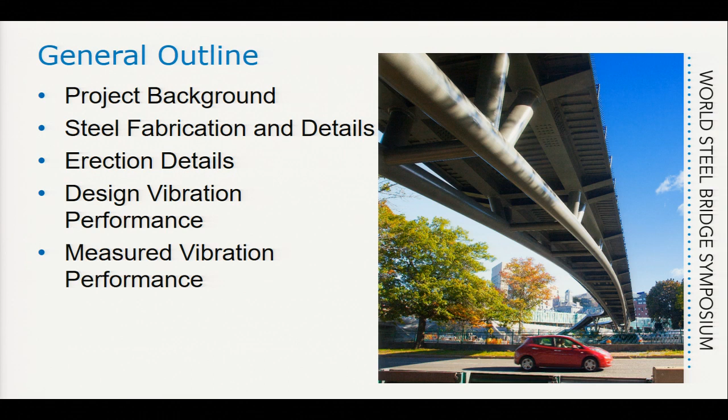I'm going to give you a little project background this morning, some of the steel fabrication and detailing that went into this bridge design, as well as some of the erection details during construction. And then I'm going to hand it over to Bill to talk more in depth about the pedestrian-induced vibration design, as well as our testing that we did once the bridge was constructed.

The bridge is located on the Boston side of the Charles River, adjacent to the Longfellow Bridge project, as Jeff mentioned, which you can hear about at 3 o'clock today if you're interested. And you may wonder, who is Fanny Appleton? Well, Fanny Appleton is the second wife of Henry Wadsworth Longfellow.

The bridge is a main thoroughfare for pedestrians as well as bikers between Charles Circle, which is the Red Line T-stop for the MBTA, and the Esplanade. If you're familiar with the annual 4th of July events in Boston, the Boston Pops play on the Esplanade. Hundreds of thousands of people show up, and when the fireworks end, those hundreds of thousands of people are trying to get back to the T to get home. So the live loading on this bridge is literally shoulder-to-shoulder people at the end of every event on the Esplanade. So we did go ahead and up the standard live loading on the design of this bridge.

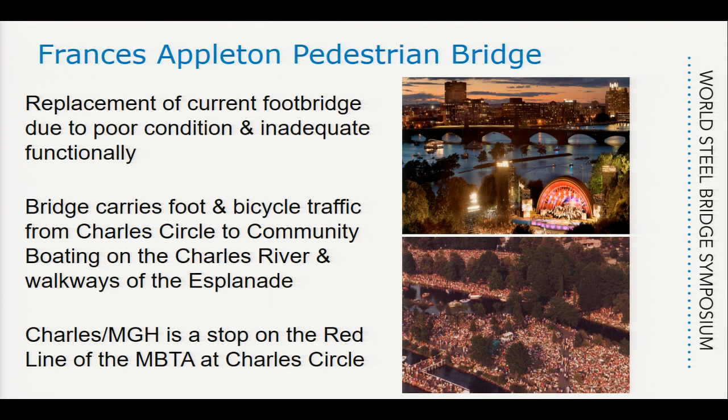As we said, we worked in a design build contract, for the joint venture WSC, which included JF White, Skanska, and Consigli. The fabricator was Newport Construction out of Maine, and the erector was Saugus Construction. We had a very detailed contract in terms of some of the requirements for this particular bridge and some of the aesthetic constraints. So working with the contractor, we tried to balance the service and strength design along with the pedestrian user experience.

So we had a preliminary design that we were given that had an architectural intent for this bridge. The intent was for it to look like a ribbon-like structure, and the arch was supposed to emulate the arches of the Longfellow Bridge nearby. So you can see there's a steel fascia plate that runs along the edge of this entire structure, which gives it that ribbon-like appearance. The bridge also is ADA compliant, is wide enough for shared use between pedestrians and bikers, and we also created an overlook so you can see the Charles River as you're weaving through the trees.

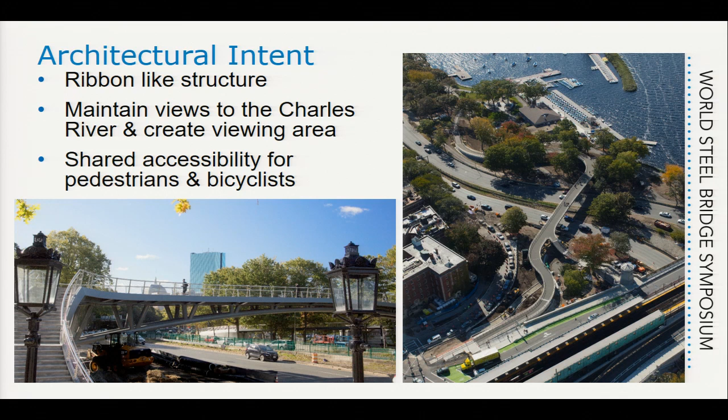Here you can see an overall view of the bridge as it curves in every direction for 750 feet. 100 feet at either end are concrete ramps, and 550 feet are elevated structure.

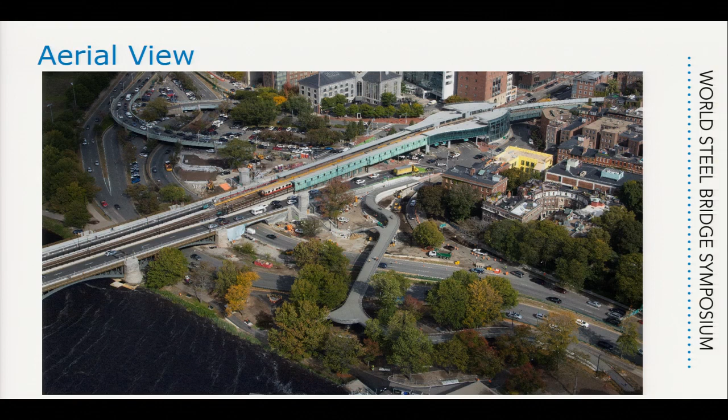The main span of the bridge is a divergent pipe arch, as you can see here, with HSS spandrel columns, which make up the Vierendeel truss of the main span. It's 220 feet, and it is supported on either end, as you can see in the foreground, by skewback abutments.

And the elevated sections of the approach spans are supported by Y piers. You can see the framing underneath: there's a pair of box girders that run continuously from end to end, floor beams, a cantilever bracket that supports the fascia plate, and the Y piers, which are welded at the top to those girders, have an architectural inset, if you can see on the photo to the right. That was prescribed by the architect as well.

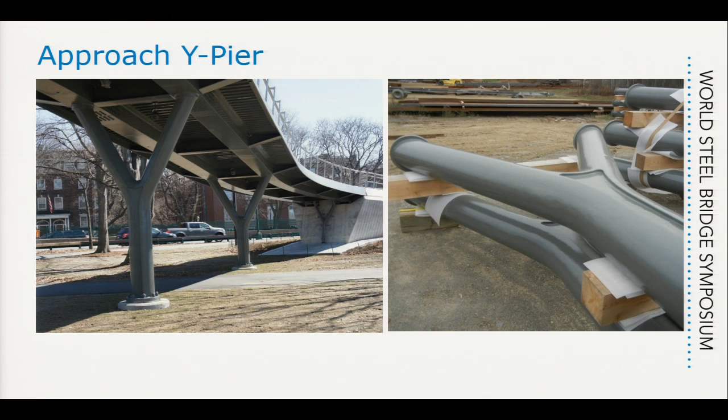In order to create that inset detail, we created these piers as a built-up section at the base, an HSS built-up section, and HSS columns for the arms, and the Y joint was created with a steel casting.

Newport Fabrication brought in Cast Connex to fabricate the casting. We did a design on the casting as well as Cast Connex in order to create this detail and geometry.

One of the constraints of the contract was that the bridge was to be jointless. So between the 550 feet from abutment to abutment, there are no expansion joints, which drove temperature loading to be a very prime design loading condition.

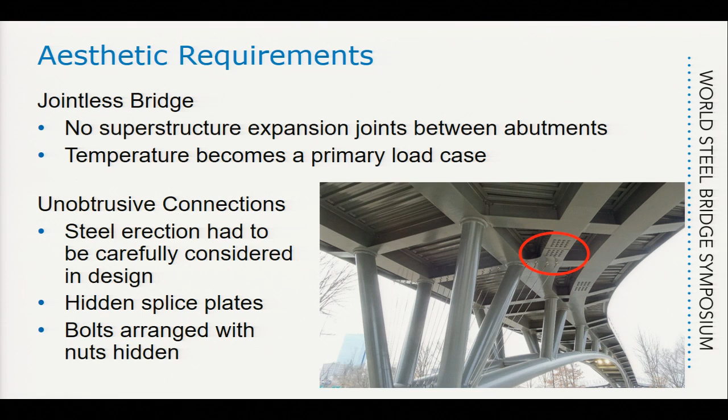We were also prescribed to have unobtrusive connections, which led to a lot of discussion as to what unobtrusive really means. We did propose to include bolted splice connections on the tub girders to aid in erection. However, the splice plates are internal to the tub girders and the nuts are on the inside, so they are less visible. We also had to show along the length of the bridge the location of those splices so they were less visible to the traveling public.

The fascia plate girder that travels the entire length of this bridge is continually curving throughout. In order to create that fascia plate without any kinks or waves, we had some really tight fabrication tolerances, similar to architecturally exposed structural steel.

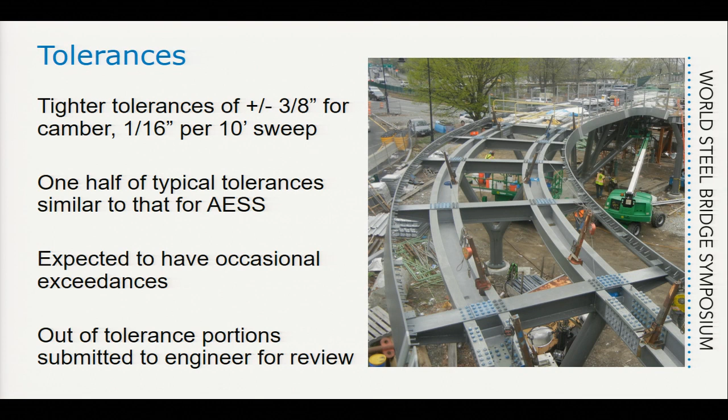Those tolerances translated back to the fabrication of the box girders as well. Because the fascia plate is supported by the cantilever brackets off the box girder, those girders had to match that same tolerance that the fascia plate had in order to meet fit up.

Here you can see the entrance at the ramp. The ramp is 100 feet, it's concrete. You can see that the architecture kind of matches that ribbon type appearance at the top, and then it has an incline down to the foundation.

In Boston, right along the Charles, the soil is fairly poor because it's all been filled in. So in order to reduce the amount of substructure and piles for this foundation, for this ramp section, as you can see in the foreground here, we filled the concrete ramp with foam in order to lighten that up.

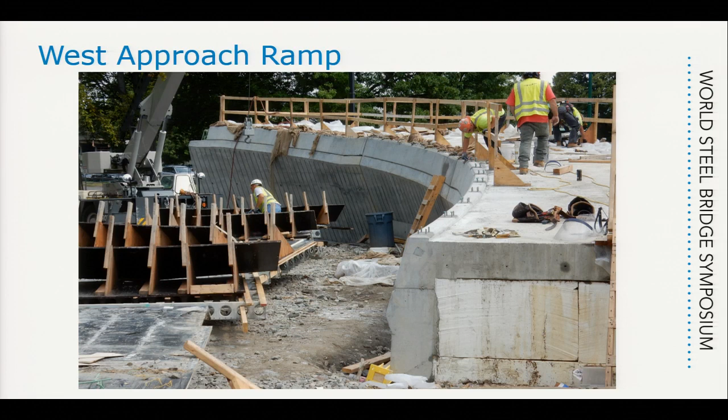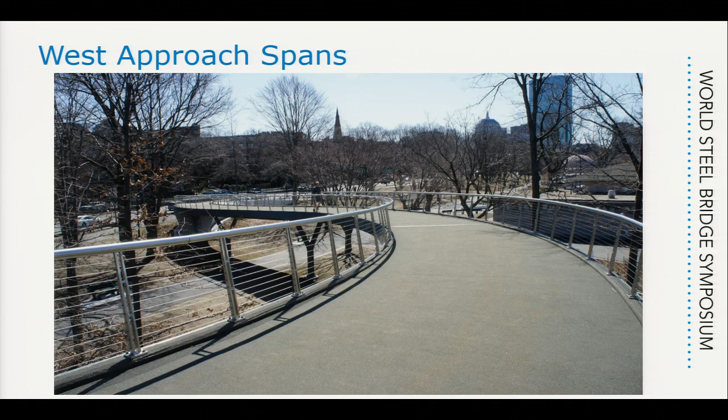The entire length of the bridge has an epoxy-coated wearing surface and a railing system. The infill on the railing system is a stainless steel cable system. And here you can see the overlook that was created looking out into the Charles River.

This is looking up to the crown of the arch span. Every piece of steel is curving in every direction throughout the length of the bridge.

Here, as you come across the main span, the ramps part of the bridge continues, but we also have stairs as well. So at either end of the main span, there's a set of curved stairs, and here the curved stairs diverge from the main bridge deck structure.

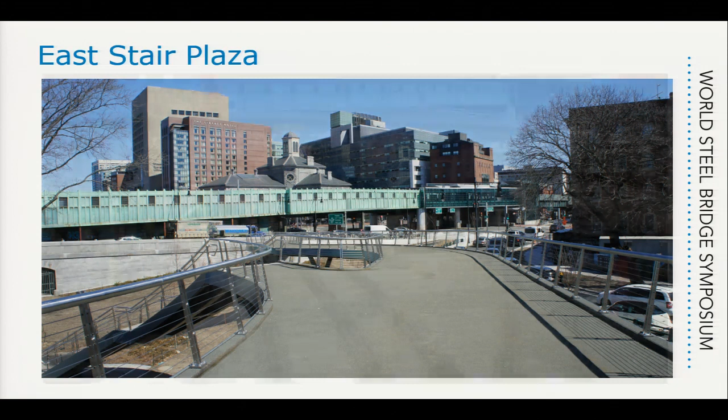This is a little tricky in creating that fascia plate. It's a pretty tight radius on that fascia plate. The detailing to merge the two sets of box girders and splice those together created some interesting detailing for the plate connections.

You can see here the shear studs on the top of those girders, as well as the stay-in-place forms that were used.

The curved stairs span from ground to bridge deck elevation. There's no pier in between, and that's supported by 4 steel girders.

The 2 main girders in the middle you see here, being in the shop. And the exterior fascia plate girder, which we've created into more of a structural member to help support those stairs, and Bill will touch on that more later.

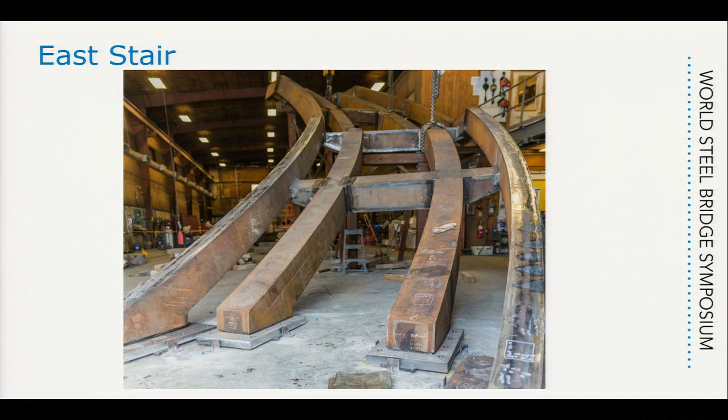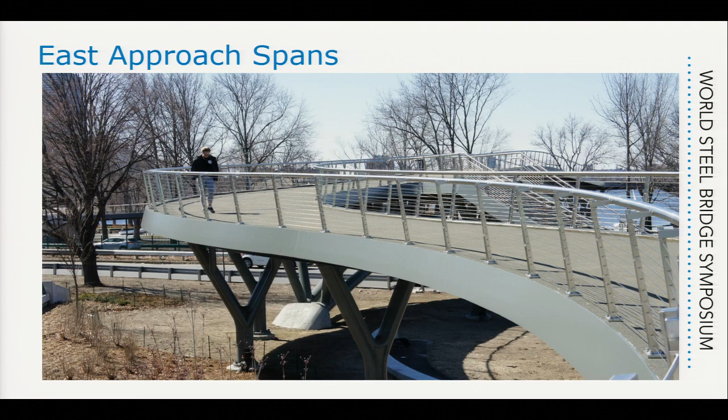Here's just an example of how that fascia plate, in curving throughout, is very smooth. And here, coming down to the ramp at Charles Circle.

The arch sections were delivered in 2 pieces and then spliced together on site. The short spandrel columns were welded to the arch section in the shop. However, the longer spandrel columns we could not weld in the shop due to shipping delivery constraints.

So we created some alignment studs so that once the spandrel columns get out into the field, they'd be able to set those because, again, they're not perpendicular square—everything is on a different angle. Those studs assisted the erector in trying to line everything up.

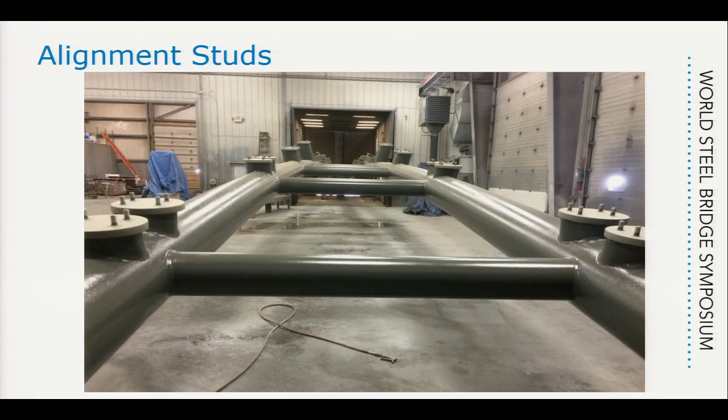The main deck framing was fabricated in 3 sections for the main span. Here is a picture of the center section getting dropped in on top of the arch, on top of those shorter spandrel columns. So that framing all came out together.

Here you can see some of the erection tabs that were used on those spandrel columns to get those in place. They were field welded, field metallized, and then field painted. The cap plates as well were welded to those tub girders at the top in the field.

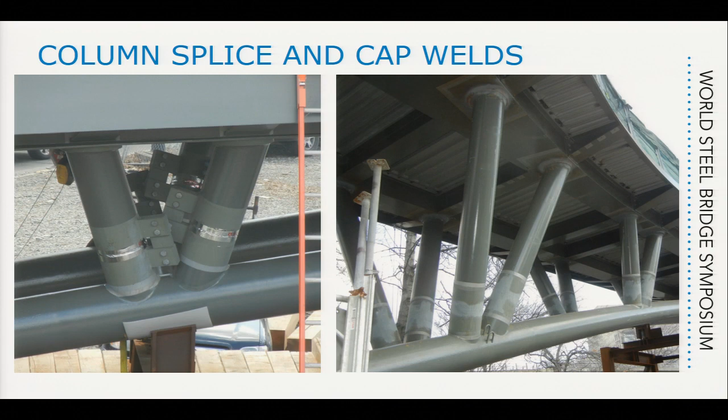And with that, I'm going to turn it over to Bill to talk about the pedestrian-induced vibrations.

Thanks, Marian. As you can see, this is a fairly slender arch shape that we have to deal with here. From the very beginning of this project, we realized that pedestrian-induced vibrations could be an issue for this bridge. Generally that occurs when the frequency of a bridge is low enough that it starts to coincide with the actual pace that people walk at. When those two frequencies align, you get an increased magnification of the response of the structure. So in some ways you can eliminate that by changing the stiffness, changing the mass, or introducing damping of the structure.

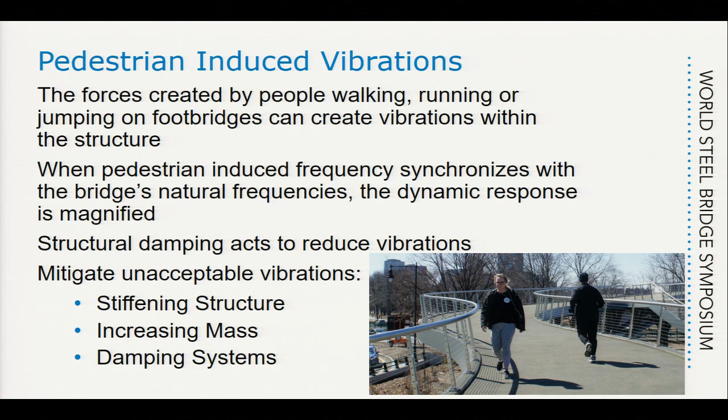By contract, we were required to meet the requirements of the AASHTO pedestrian guide: 1.3 hertz for any horizontal mode, 3 hertz for a vertical mode, or they give an option for meeting an alternate criteria based on the weight of the span. So we met the horizontal. We didn't meet the 3 hertz, but we met the weight requirement.

Being a high-profile bridge, we wanted to make sure there wouldn't be any issues where we open this bridge and then have to shut it immediately afterwards due to vibration. So we ended up doing an additional analysis using Setra, a French publication that's actually referenced by AASHTO. It allows for a time history analysis of the structure, and it takes the accelerations that come out of that time history and gives you different comfort levels that you can associate those accelerations with.

We also used a specialty sub-consultant, RWDI. They ran an independent analysis of the structure, and later on helped us with the physical testing of the bridge. So just a brief overview of what we did for modeling.

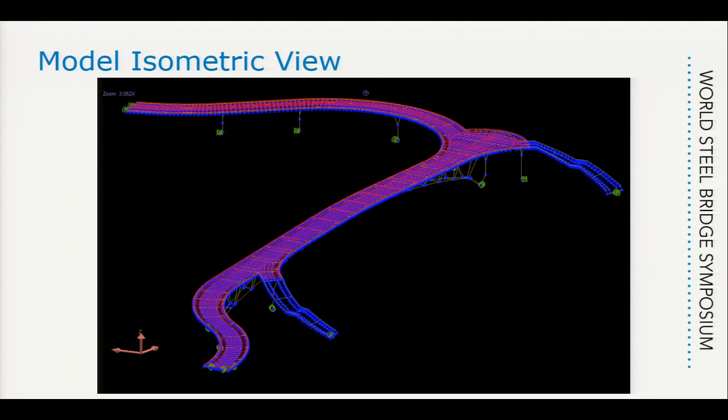It was a full 3D model of the bridge, steel length, 550 feet end to end. We had soil springs for foundations, and we put in shell elements to reflect the stiffness of the deck. Our first vertical mode of vibration shown here is kind of a vertical and longitudinal movement of the arch, at 2.39 hertz, which is less than the 3 hertz that I mentioned earlier.

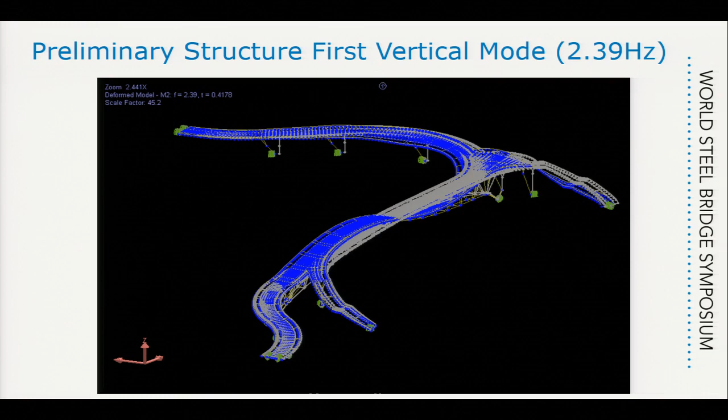So we knew we were going to be in this realm of having to do additional analysis. Setra lays out basically 3 acceptable comfort levels for pedestrians: maximum, average, and minimum. If you don't really meet those, then you end up in an unacceptable area. Our initial design landed us in the average towards minimum comfort range. In talking with the owner and MassDOT, we decided that we should probably shoot for a maximum comfort level, which would be up to 5% of gravity, and that's basically practically imperceptible to most people walking across a pedestrian bridge.

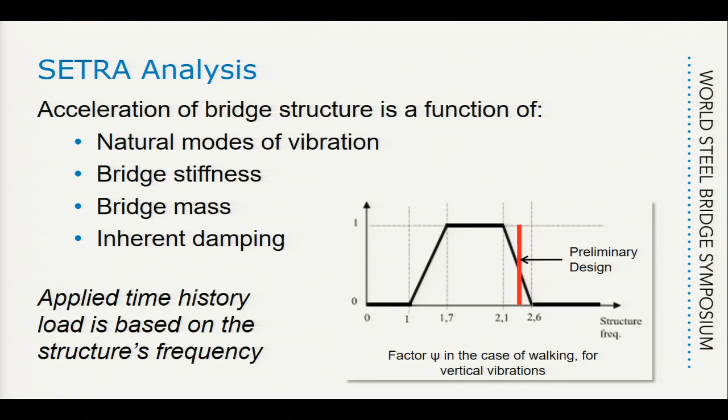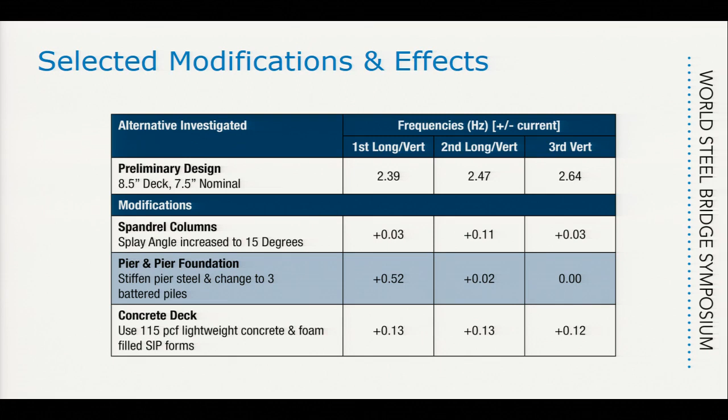So we started with that 2.39 hertz, and we were at a minimum comfort level. We decided we had to make some changes to the structure. We looked at about 15 different alternatives. What we really came up with was making changes to the deck system, spandrel columns, and the pier and pier foundation stiffnesses. For the deck, we had originally started with a normal weight 4,000 psi concrete. We ended up changing to a 5,000 psi lightweight, foam-filled, all stay-in-place forms so we could get rid of any additional mass that's not really participating in structural stiffness.

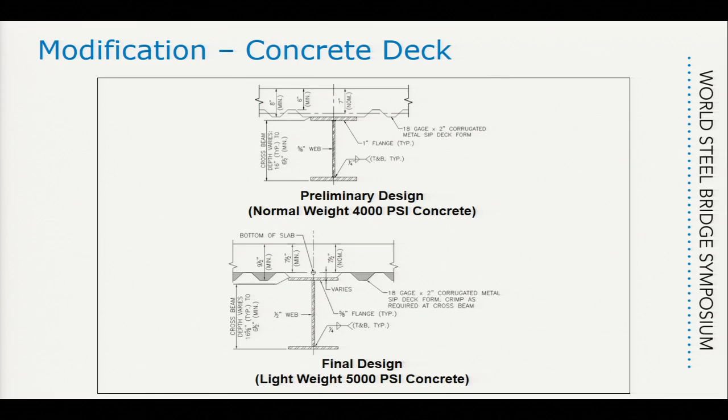The spandrel columns, we went from 7 degrees from plumb, which really acted only as a Vierendeel truss, to a 15 degree offset. That gave it more of a normal truss action, although it still really relies on the Vierendeel truss action.

As Marian mentioned, the structure is continuous, so thermal effects control a lot of the pier loadings, so we weren't able to stiffen every foundation. But we did examine which piers would allow for a stiffer foundation, and we changed from a 2-pile vertical configuration to a 3-pile battered configuration to add stiffness in each direction.

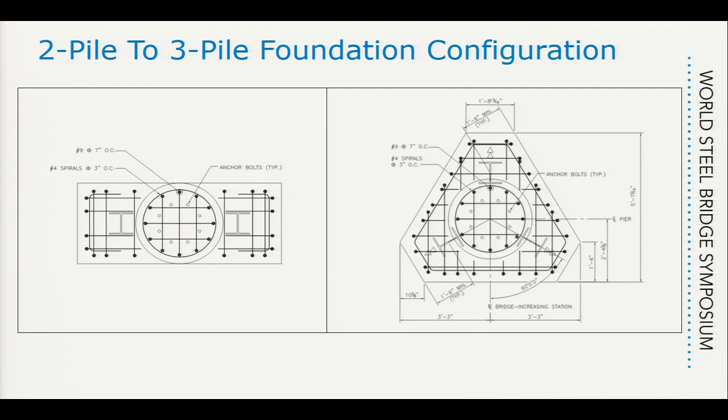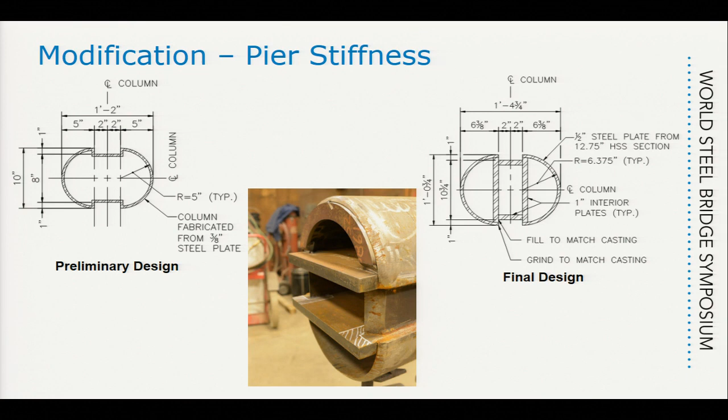The pier columns themselves, we ended up increasing in size, but towards the base of the columns we also put in internal stiffening. The photo in the middle of the screen shows the internal stiffeners running through the base of the column. Those ran through the base plates and were welded on the underside of the base plate to develop forces in them. You can see some of the backer bars starting to get placed in this section as well.

So we got up to our design for maximum comfort. Next, we needed to physically test this and make sure it would respond the way we wanted before opening it to the public. Again, we didn't want to open it and close it immediately afterwards - it wouldn't be good for us as the designer or for the state to have that occur.

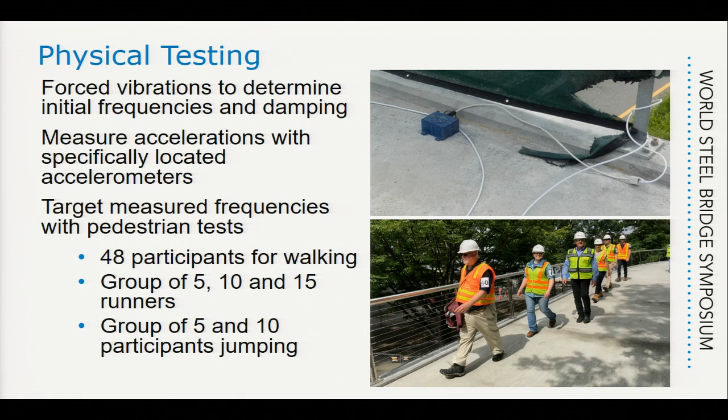So we ended up getting 48 participants to do our own testing of the bridge, and we placed accelerometers throughout. Initially, accelerometers were placed on the bridge and excited just to determine the actual mode shapes, the frequencies, and what we actually had for damping.

So the first mode that we originally were looking at, we thought was primarily a horizontal mode shape. The actual testing returned that there was a significant vertical component to that, due to the torsion of the main span. The other mode shapes identified by the Setra analysis would no longer be a concern. We also saw a bump in the damping from our testing.

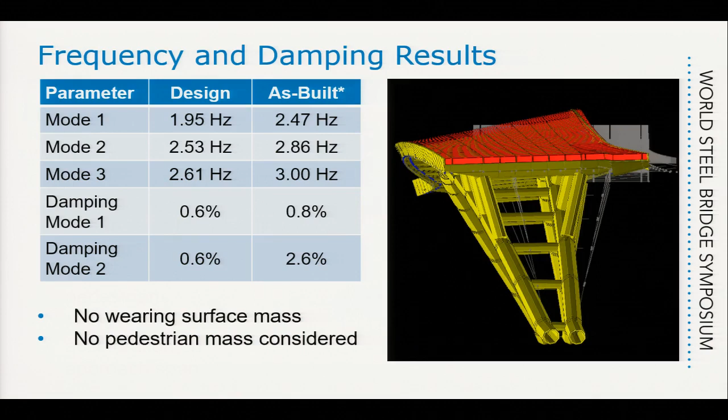So just from our general walking tests that were performed, everything landed within 5% of acceleration of gravity, which is what we were looking for. We did random testing, and then we did group tests where we had groups of 2 or 4 walk across the bridge. We had a metronome set to specifically target the frequencies we measured during that time.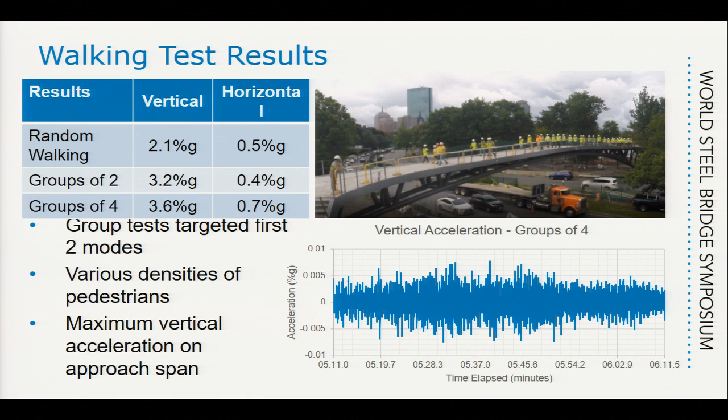Running Setra doesn't necessarily require that be examined - it's a short duration excitation to the structure. There's only a short amount of time where that vibration would affect anybody on the structure. In our case, this bridge empties into Charles Circle, which really eliminates the possibility of anybody doing road races or major events, because there's nowhere to put these people after they cross the bridge.

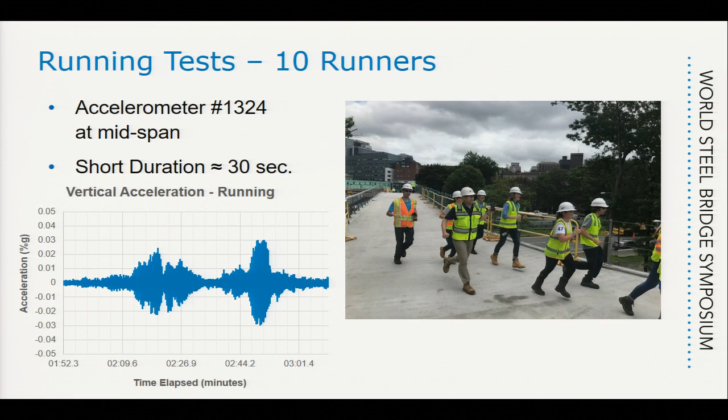Nonetheless, we did do some running tests on the bridge, with groups of 5, 10, and 15. The chart here shows what was going on with 10 runners. Again, about 30 seconds is the disturbance of acceleration actually observed on the structure, and it was still within what we were considering maximum comfort.

So obviously there was a jump between what we did for design and what was done for as-built. So we went back into our original design and adjusted parameters to try to match what was done in the field testing. When we did our field testing, we also didn't have the epoxy wearing surface, which would add some additional weight to the structure. So we wanted to match the field results and then make that adjustment, and make sure we still didn't have any issues after that.

So the 3 big ones that we probably ran into: we assumed 5 KSI concrete. At 28 days, our average strength was 7.4 KSI. By the time we did testing, we probably had some additional gains beyond that, but a decent change there.

Due to the curvature of the bridge, we had assumed that we would take stiffness reduction for cracking. We ended up putting in number 6s at 6, which is very heavy, to control the cracking in the bridge deck, and that actually proved to be quite successful. At the time of testing, there was very little cracking on the actual bridge deck, so that initial assumption was conservative.

When we developed our design, we also did 2 different foundation stiffnesses, a lower bound and an upper bound. We wanted to use the lower bound for our vibration analysis, but the higher bound for our seismic design, to make sure we were capturing what the structure actually might see. It turned out that the higher bound stiffness was realistically more what we were seeing during the testing of the bridge.

From there, there's obviously some differences between what we got in our field measurements and what we actually got from SETRA. Our horizontal accelerations were fairly close to what was determined by SETRA, but we did have differences in the vertical accelerations. We had 48 participants, which I mentioned earlier.

When we were grouping people, we did allow for some change of density in that grouping and how tightly people were spaced, but overall, we're not going to meet the same number of people that you would need to fully load the bridge with only 48 people. We were mostly a mix of our design team and construction workers, so our average person was a little heavier than SETRA's. Everyone participating was able-bodied, no children, no elderly people, so actually matching the pace and frequency of the structure would have been much easier than your average sampling of the public.

For our overall goals, we met the 5% of gravity. That's really what we wanted to meet, getting a maximum comfort level out of this bridge. The only case that did not meet that was a case of vandalism, where people were intentionally jumping on the structure.

SETRA gave us a great way to actually examine the initial structure, make improvements to it, and then evaluate it based on a dynamic loading. I think it very well served us in getting the goals for this project. In our final design, I'd say we still don't meet the AASHTO 3 Hertz vertical requirement, but going through all this additional analysis and testing, we've shown the client that we do actually meet the acceleration requirements for maximum comfort.

So here's an assessment question, and after that you guys can take down the PDH code if you didn't catch it at the beginning.

Do they need the answer now? I don't think so, nobody mentioned that. So the answer would be C, acceleration. That's kind of what I've been trying to rehash throughout this. Obviously, everything else in here does play an impact into that.

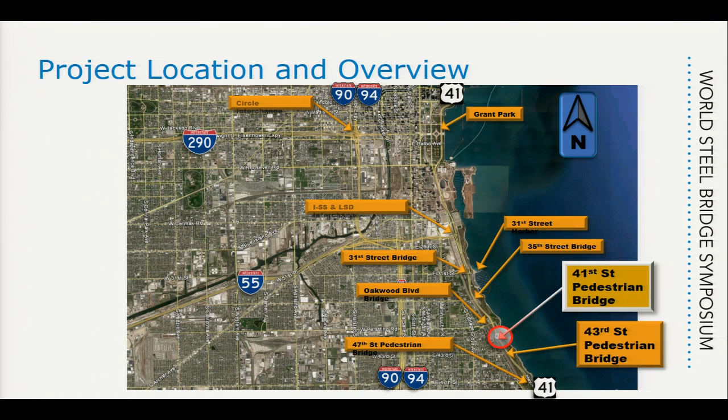For those of you not from the Chicago area or who don't know Chicago, this is a map showing a bunch of projects currently happening in Chicago, a lot of them from the Chicago DOT and Illinois State DOT. The project we're covering today is located about 4 miles south of downtown Chicago, along Lakeshore Drive, and also spans over an active railroad. It's right next to the Chicago Bears' stadium, so if you've ever visited there, you've probably driven through that area. There's a lot of construction happening in Chicago, so it's a very busy time of year for us.

The project started around 2004, almost 15 years ago. This was a competition that Mayor Daley announced, and it was only open to architects to submit applications along with engineers. There were 6 locations chosen as part of this competition, and the whole point was to create lake access. Chicago has an ordinance that requires lake access every quarter mile, which is nearly impossible, but the city is trying its best to create those access points.

Part of that came out of these 6 locations, and AECOM was fortunate to be part of 2 of them, with our architect Cordogan Clark. So what you're seeing here is exact rendering. The paint that was used was basically brush paint used to submit. There were no computer drawings or anything.

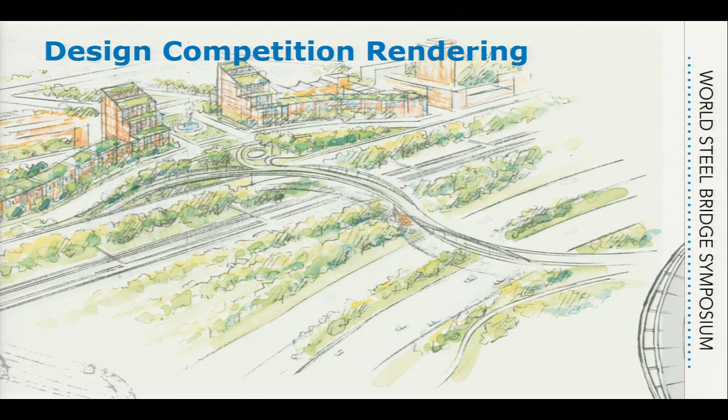I have a series of renderings I want to show you, and it was picked overwhelmingly by the public, by the residents on the south side, and we respected that. We wanted to make sure we followed through and delivered exactly what was picked 15 years ago. As time passes by, it's hard to make those commitments that were made years ago, but we were able to do that with the help of the City of Chicago.

This is just the overall rendering of the site. You see downtown in the background. There are 2 locations, 41st and 43rd. 41st opens to the public in December, and 43rd, the lower part of the picture, is currently going to procurement very soon and is planned for construction late this summer. It'll be 2 identical projects within a quarter mile from each other.

Again, just showing you the site. It's a pretty intense site. You have a lake very close to you. I'll talk about this later when we discuss construction staging, but it was very unique for us to think through how they're going to bring pieces of steel—will they barge it? With the procurement rules, we can't talk to a single fabricator because we have to be fair, so we talked to several fabricators, brought them onto the same platform to make sure they understand. We also wanted the details and plans to be constructible.

I could not do justice to the site by any photo or slide, but it is an extremely tight corridor. You have lakefront property that has to be protected. There are significant lake users in this area, bicycles and pedestrians. There are 6 active railroads, and we'll talk about the challenges of those.

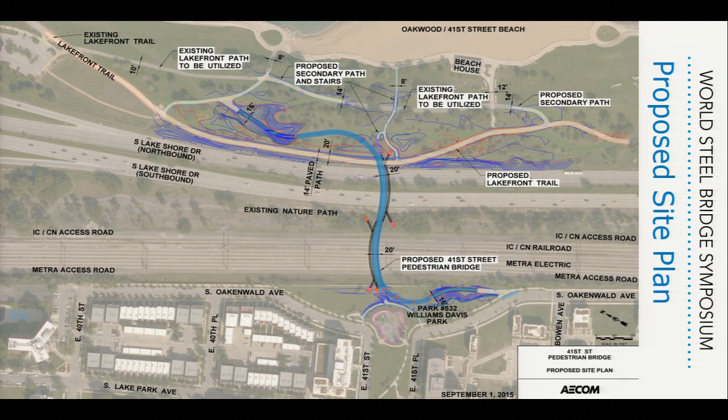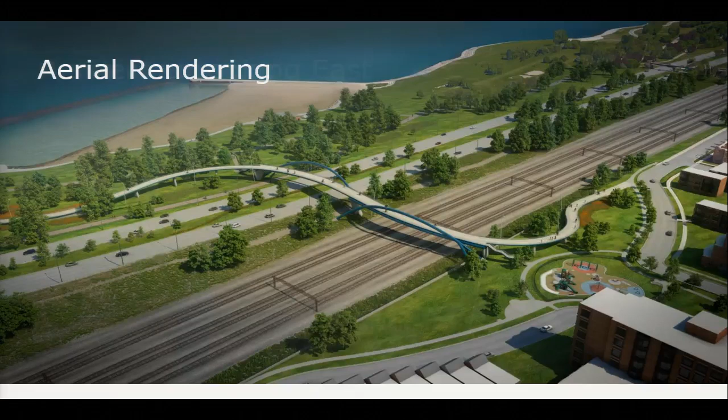We had to work around all those constraints, not only for design but also for the construction side of it. I'm going to walk you through some quick renderings, and these are important to see because the final bridge product looks just like that. We're very proud that, with the help of the city, we were able to deliver exactly what was promised years ago by an architect.

Now I'm going to say a few things to the architect community—no offense if you're an architect, we love working with them, but they sure know how to make our life miserable, and I don't have a better word, so I'll stick with miserable. What you're seeing here is what we actually improved to the concept. The kickers you're seeing, these are the basket handle kickers—they were not in the original plan by the architect. The arch angle was 45 degrees.

When the job came back to life after 10 years of planning, we did the model, and you heard about the natural frequency—I can attest to what you guys went through. I don't want to put any number to it and get the legal team involved, but the numbers were not right, and the natural frequency was not correct.

We got really concerned, so we did 3D modeling and brought our client into the office to demonstrate that we don't feel comfortable with the 45-degree arch. The deck is curving along with the arch, with absolutely no support. Luckily we're not the St. Louis Arch, but you can imagine how steep it has to be. If you just do a free body diagram, the center of gravity is way far south.

So the pipe has to be robust enough to not only sustain the self-weight, but carry the curving deck and vehicle and the live load on it, and we didn't feel good about the initial design.

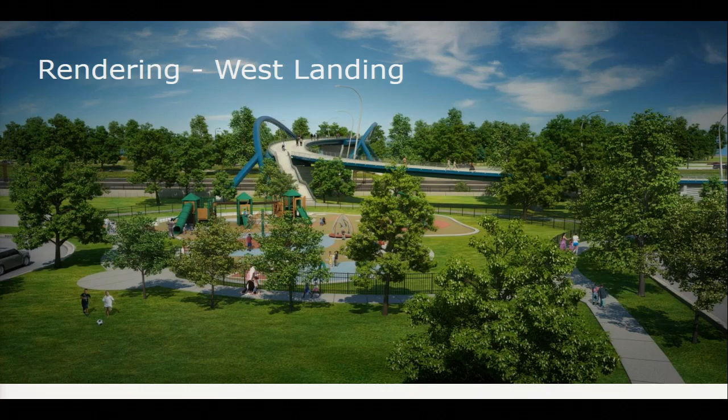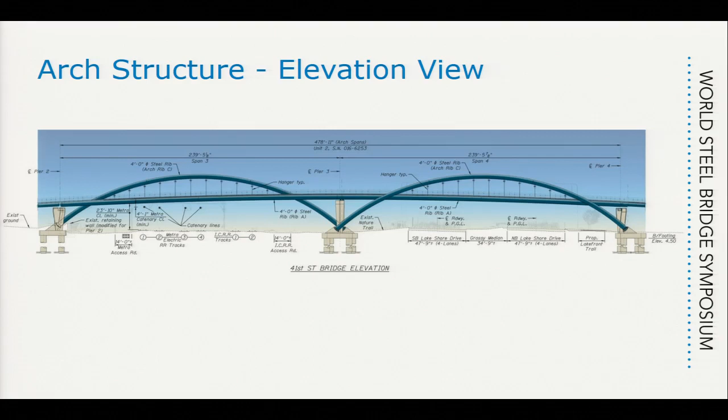Again, a few more renderings of the bridge looking onto Lakeshore Drive, and this is right next to the park. The local community is very attached to it, so we did a lot of renderings to convince them what they are going to be getting. I'll save the structural part for Singh, but the main arch is 2 spans, one over the railroad and one over Lakeshore Drive, and they both are 240-foot spans. They are curving in an S shape, so it's really elegant. This is the cross section.

So the main arch is 4-foot diameter. The cables are hung from the main arch, and then it picks up the 2 tubes, which are the deck tubes that support the entire deck. So you can just imagine the amount of torsion, and you'll hear about it.

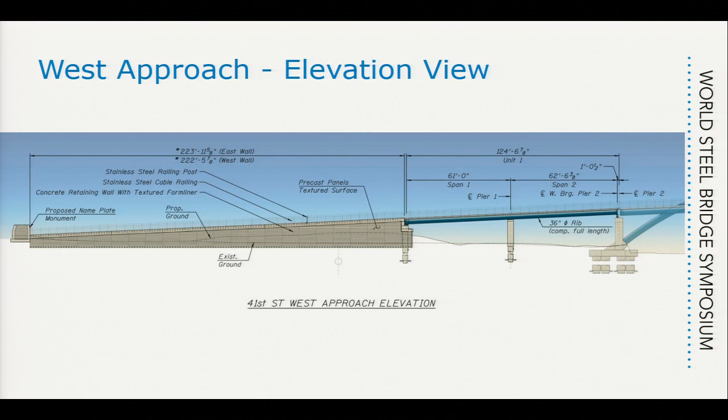But the approach also, we were trying to make it very sleek. So the approach on both sides of the main span are 2-span structures. It's a single curving tube, followed by the MSE wall. We tried to minimize the MSE wall length so that we don't block the lake view from the park, but we had to do an economical balance, and we came up with 2-span structures and the remaining MSE wall. That's the cross section over the approaches, again a single tube, 3-foot diameter tube.

One more thing I want to talk about is the temporary bridge. This was a very unique application. We had significant discussion with the railroads, and there were a bunch of active railroads. Basically, after years of negotiation, they told us that you will have between 1 a.m. and 3 a.m. to construct anything, and rightfully so, because they are carrying a lot of traffic there.

And we figured if you were to do that, just to build this bridge, you're looking at years of downtime, flagging cost, and just a ridiculous amount of coordination. Any one of you who works for a railroad knows it's either their way or the highway. So what we decided to do is not deal with them too much and come up with a temporary bridge.

So again, this is not very uncommon, in the Chicago area we do a lot of this, I know it's been done everywhere. But this temporary bridge was very complicated, and it's a very high ticket item too. I won't go into numbers, but it was needed, it paid the premium many times over.

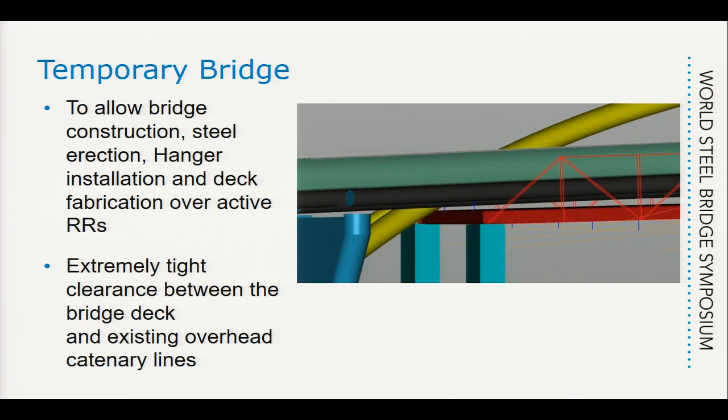We had to make sure that we build this temporary bridge in between the proposed deck and the overhead catenary lines. There's a next slide which shows you how many catenary lines are there, these tracks are run by overhead power lines. So we had literally 5.5 feet between the proposed bridge deck and the top of the catenary lines to sandwich this temporary bridge.

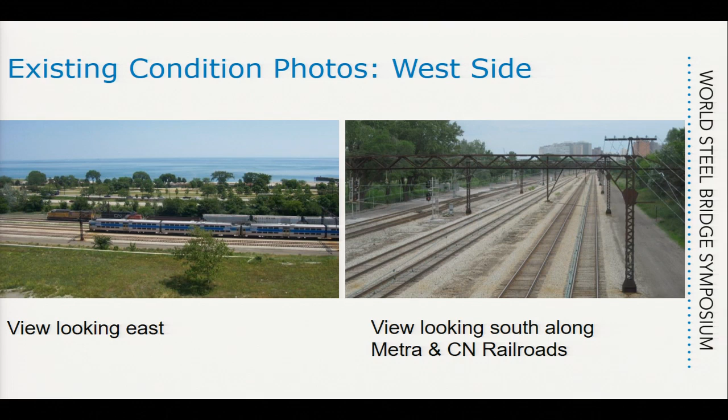And I don't want to use a cheesy word, but we did a 3D model. The red is the temporary bridge. We took it upon ourselves to do the 3D model, we wanted to be convinced. There are 4 tracks of commuter line and 2 tracks of the freight line.

There's a space in between, enough to put a shoring tower, but that comes within 25 feet of the clear zone for the railroad. So we did 2 designs to make sure that we could either span all 6 tracks for the temporary bridge, or have a temporary support. We wanted to make sure the contractor had options, and to be honest, we could not get the railroad to agree whether they would allow the temporary support between the tracks or not.

So we left 2 options on the plans, but both were constructible, and the contractor chose the one without the temporary middle tower, which was a smart thing to do. But again, we had to literally thread the needle.

There was maybe some thin airspace between the temporary bridge flooring and the overhead power lines below, and the finished bridge deck above. But what it did was give the contractor almost a free slate, complete freedom to do what they had to do over the 6 to 9 month period, with very minimal interruption or requirement from the railroad. So keep this in mind for jobs like this.

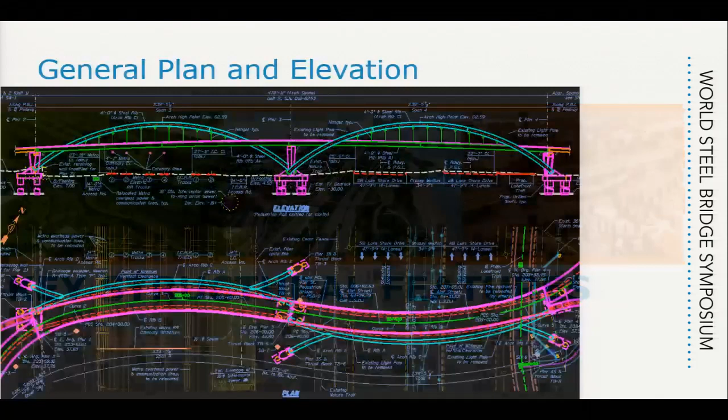Okay, this bridge has 9 spans, but today I'm just concentrating on the 2 main spans, as shown on the screen. In the plan view, you can see the deck is S-curved shape. Each span's arch is supported on only one side of the deck. Also, from the elevation, you can see we have a vertical profile, so the pier elevation between the center pier and the end pier has a 7 foot difference. So for each arch, there's no symmetry in any direction, and we're dealing with very complicated geometry.

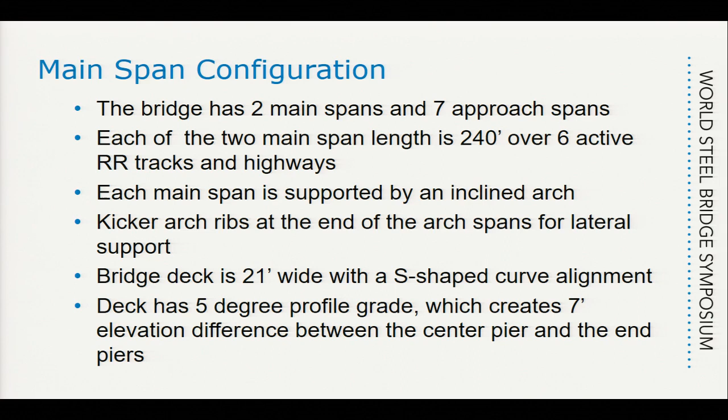Here are some details about the main span I just talked about. The structure, the 2 spans, each span is 240 feet. It's inclined 30 degrees from the vertical plane, also rotated about a vertical axis, mainly to line up with the deck, because the arch and the deck don't have the same alignment.

So this structure's configuration, as mentioned before, was given by the architect. There's a requirement that we can only use either pipes or box sections, not I-beams or other sections, only pipe or box.

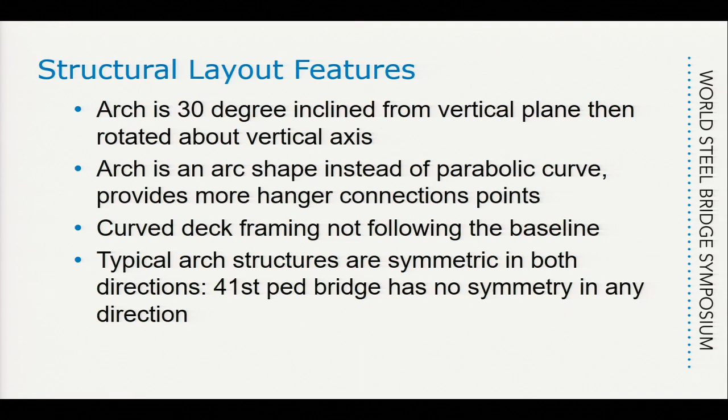So this is a very typical cross-section through the deck. We have 2 deck ribs and 1 arch rib. On the left, the deck rib is 4 feet in diameter; on the right, 3 feet diameter. It only has support on the left by a hanger, so this develops a huge torsion in the deck.

This is the end view. You can see there's a kicker to support the arch. We are required to maintain the kicker below the deck, so what we did was put the kicker symmetrical to the arch, if you look at the end, up to the joint.

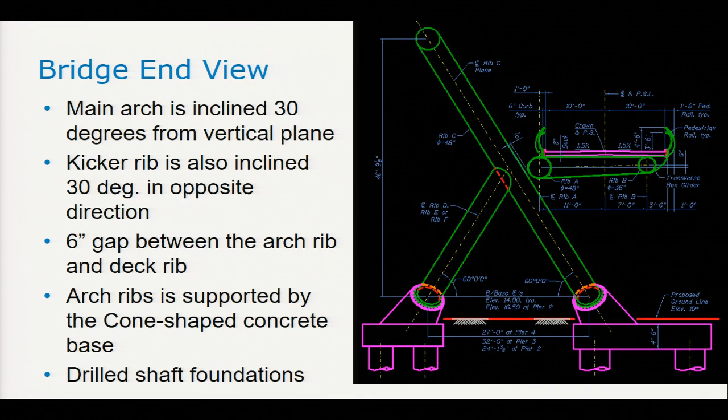Basically, all the elements in the model, we model all the steel as a frame element, and all the hangers as a cable element. Also, in order to model the construction sequence, we have to assume how those hangers are going to be tightened. At different stages the hanger will have different forces, so each time one hanger is tightened, the forces in all other hangers will change. They are very close to each other.

So the analysis results show that we have a very large torsion force in the deck, and also a very large lateral force because of the inclining hanger. So we had a very hard time designing the bearing and support. Also, another problem we had is low natural frequency, so it doesn't meet AASHTO requirement.

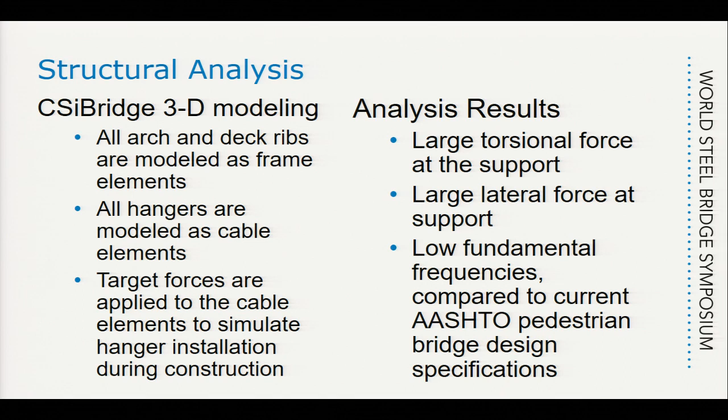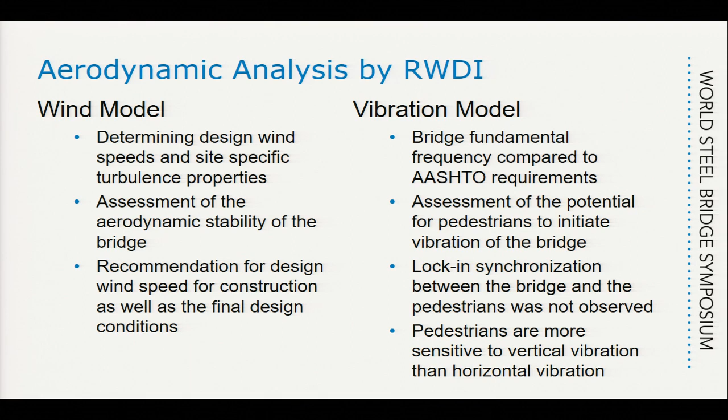Suppose, do you know how to play this video? Yeah. Oh, okay, thank you.

Yeah, because of file size constraint, it doesn't show that good.

The next one is a vibration model. The purpose of this one is to know what the real frequency is in the vertical and horizontal directions, to check if the structure is adequate.

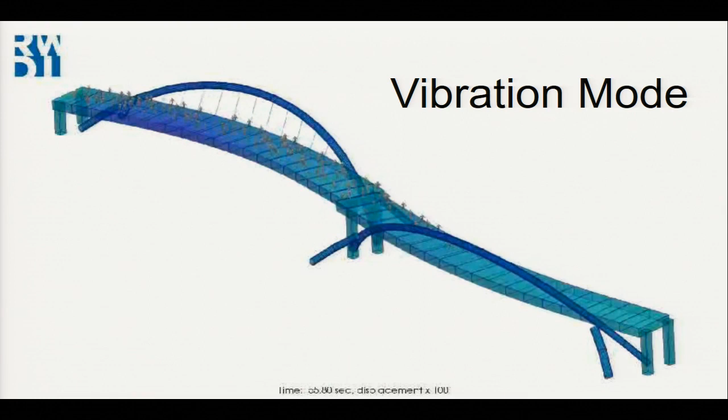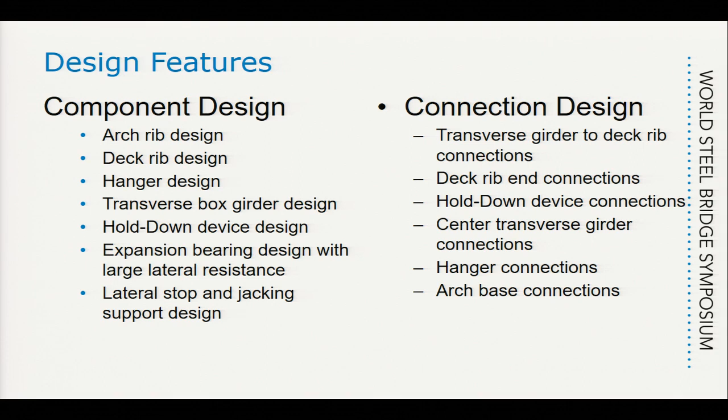Okay, next I'm going to talk about design, the component design. We have many challenges for the structure design because all those shapes are not typical shapes - for pipe sections, box sections, it's very difficult to put a stiffener inside. So the challenge is how to design those connections. I will show you those in detail.

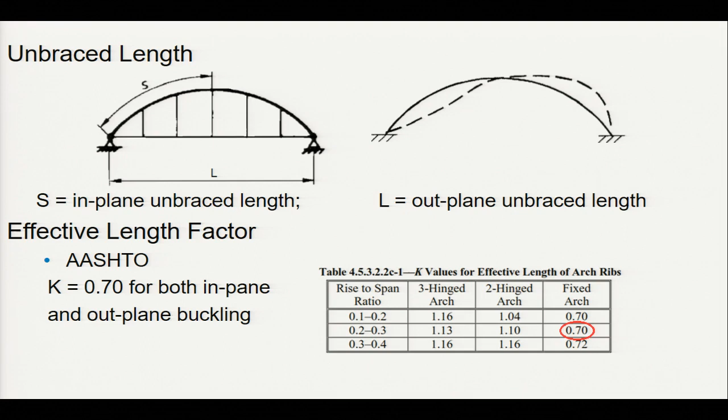The in-plane bending buckling mode will be like the one shown on the right. The unsupported length basically will be half of the arch length, as shown in the picture. So the out-plane unsupported length will just be the span length from support to support.

So for the deck rib design, because it's supported on just one side, there's a huge torsion. The main force will be torsion. AASHTO doesn't have any criteria about torsion design, so this one is taken from AISC, as shown in the formula here.

We will consider all those force components, but of course the main contribution for the stress is due to torsion. So we'll consider axial load, bending, shear, and torsion. But torsion is a main contributor for the stress.

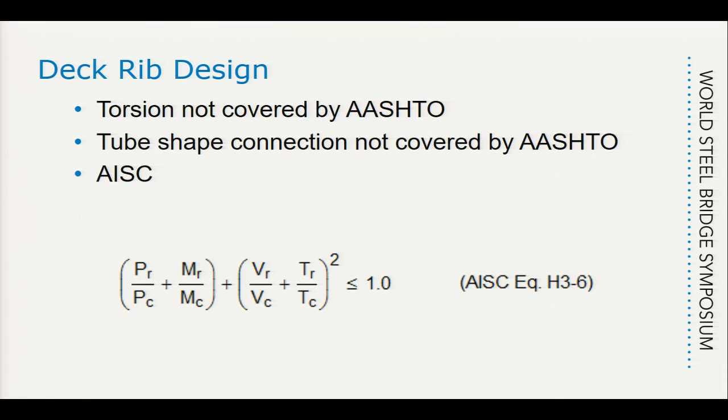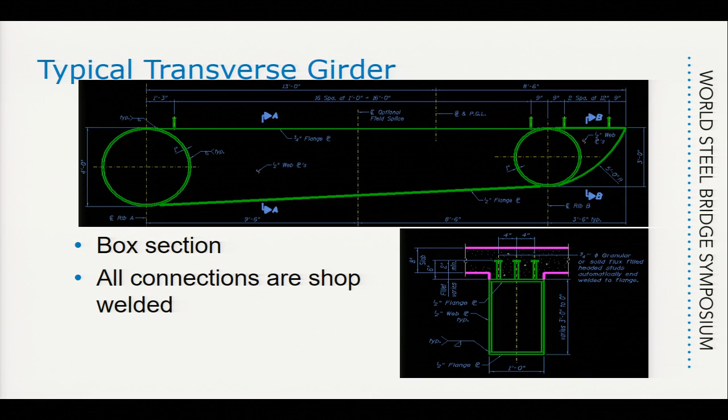This is a typical transverse girder design. It's shown as a box section, welded to the deck ribs.

But for redundancy and safety we also added a jacking device in the middle. It's a permanent jacking device for maintenance, also used for initial construction and future maintenance.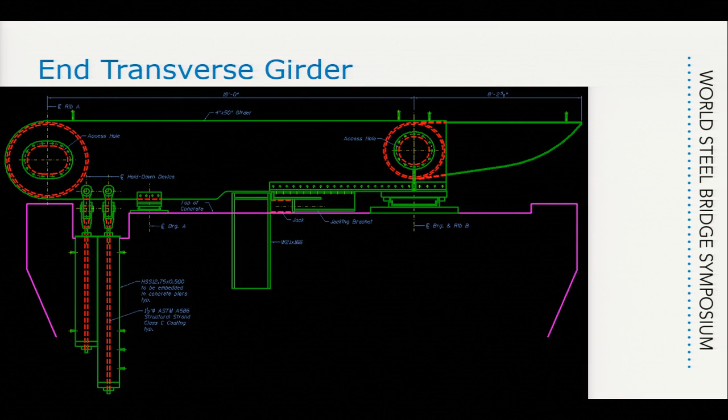In the case of bearing failure, the bracket will hit the vertical column. Also below the bracket there's a space, so a jack can be placed there for bearing maintenance and installation.

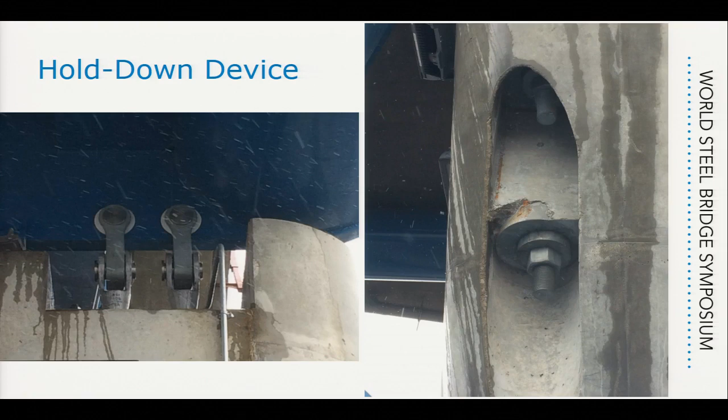Okay, this is just a typical section and beam. This is the anchor, an actual picture showing the hold-down device. This is the actual building, and this is the center girder. I'm not going to talk too much about this one since I'm running out of time.

So this is the hanger - just a single plate with no internal stiffened plates, so the hanger will act like a stiffened plate. This connection at the deck is the only place we have internal stiffeners, because of the large concentrated force.

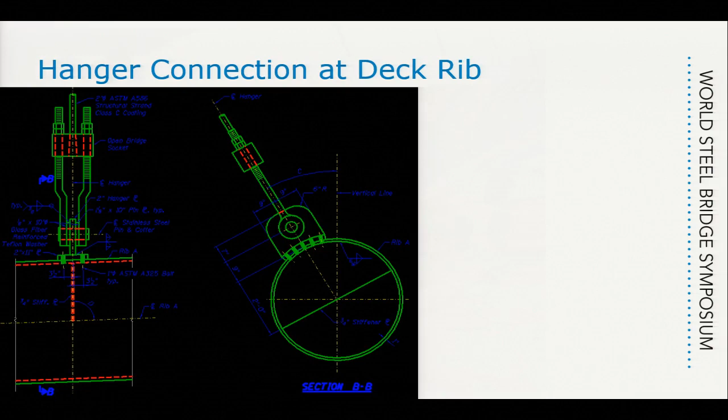This is a real picture taken during construction. These are showing the pier elevation. This is the actual pier as built - this is the base, the arch base.

Paul? Sorry. Thank you.

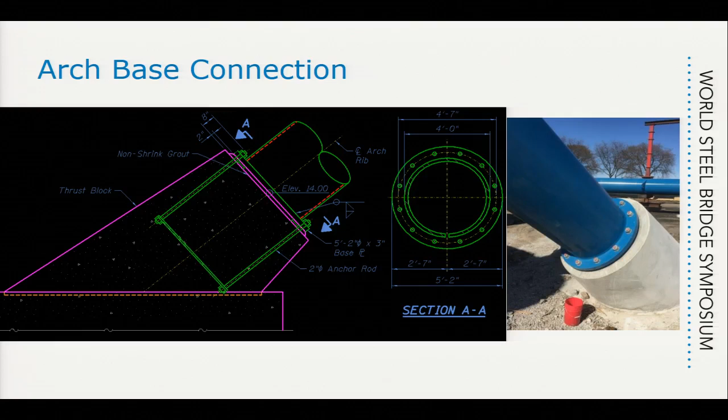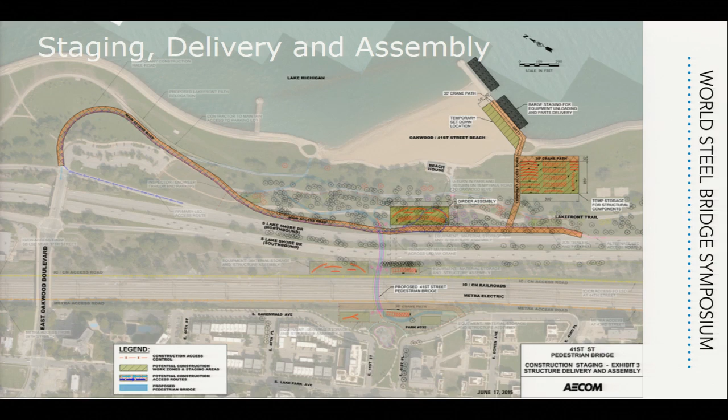In the interest of time, I want to skim through some slides about staging and construction. The real point I want to make is we put together a plan set, talking to a lot of contractors and suppliers on a level platform, to make sure what we put out is constructible, biddable, including how you ship the material.

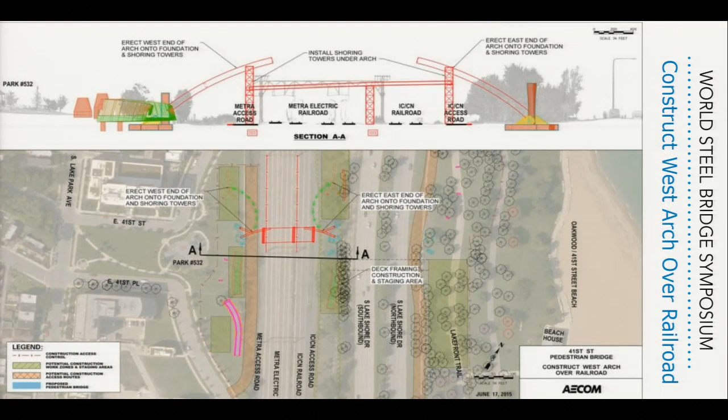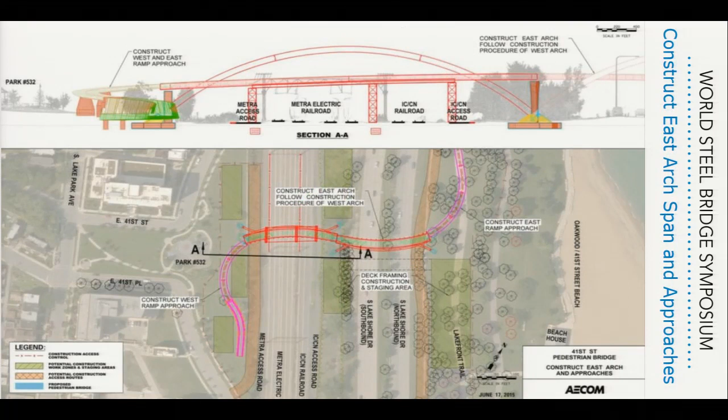We went through a series of erection sequences. We're fortunate that the contractor pretty much used that sequence, which took a lot of the guesswork out in the field. We sorted through how they'd build the temporary shoring towers, the temporary bridge, and erect the arch, and with some modifications they used that scheme, saving time for both the owner and the contractor on RFIs. It always pays off to think through how similar jobs will come together.

I want to give some attention to BendTec. This is a steel conference, and BendTec has been a great supporter of this project. They shared some real nice images with us for the main arch pipe and the deck ribs, and they were extremely good, knowledgeable folks to work with. We called them many times to pick their brain during design, to make sure we put something together that's constructible.

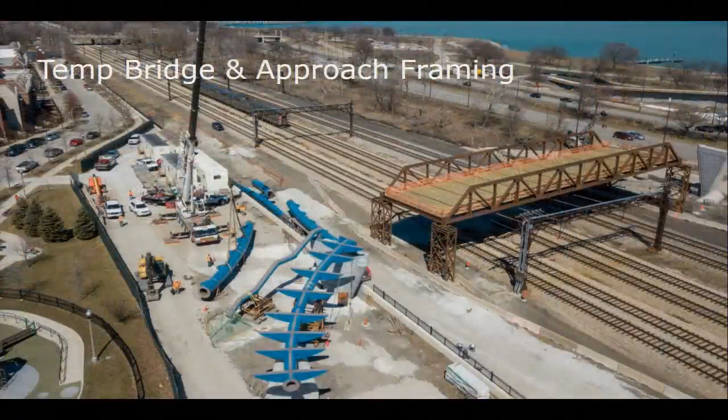The slides show how the whole job came together. Basically the approaches were built first. This is the meat of it, the temporary bridge, and you can see the train approaching. There was never a shortage of trains under the temporary bridge, which allowed the contractor to work at their own pace.

This is my favorite shot, where the main ribs arrived. It went through hundreds of permits, traffic jams, and a lot of snow. Some people followed it, I was getting texts at 10:30 at night saying it's around here. I'm like, this is cool. Anyway, these are some good erection sequence shots showing how the stuff came together.

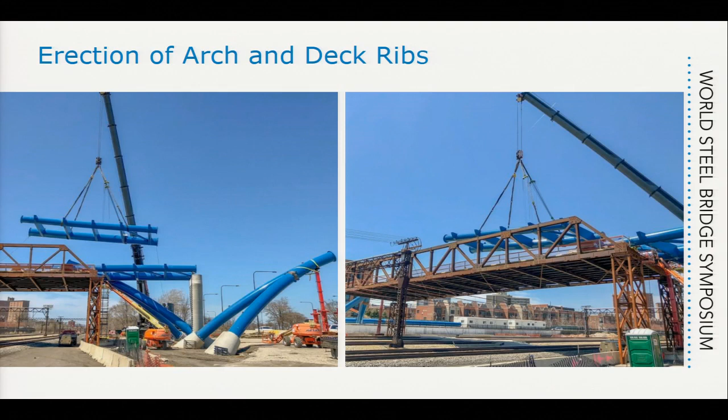We thought they'd build the railroad span first and the Lakeshore Drive span second, but the contractor altered that. They built the Lakeshore Drive span first and the railroad span second, which I think was smart because they got all the kinks worked out on the roadway span, so the railroad span came together very nicely. They wanted to minimize unknowns and challenges for the railroad area, so it was pretty smart by the contractor.

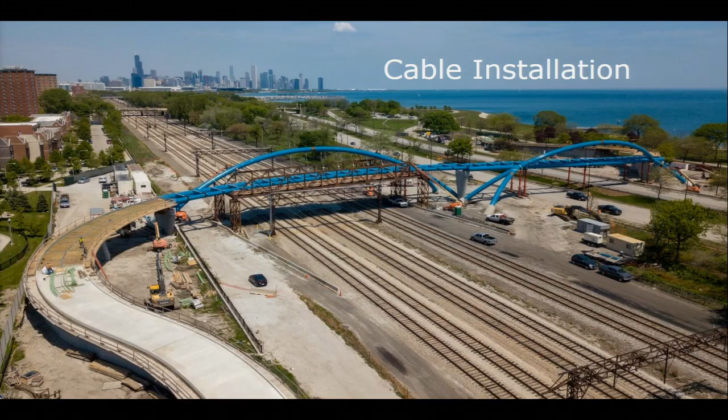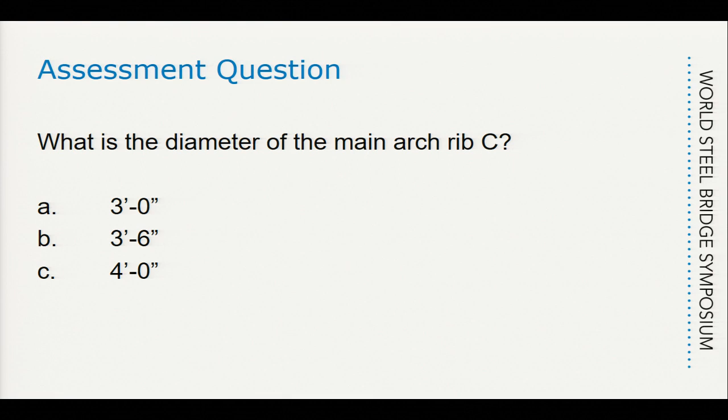So there's one question, I tried to make it simple since it's the first session in the morning. What is the diameter of the main arch rib? The answer is C, 4 feet. And there's a PDH code, 83221.

If there's a minute, I can play the video? Yep, okay, if it works. I have one quick question.

Looks like we got one here. Go ahead. Oh, sorry. Sure, can I play the video? Is it okay if I can play the video for a second? Okay.

Is there a volume? There's a volume, I don't know how to control that. It's working. It's interesting, the whole screen went blank. Well, it looks cool up here. Sorry folks, it's playing here but I don't know why it's not playing there. Sometimes there's a lag or something.